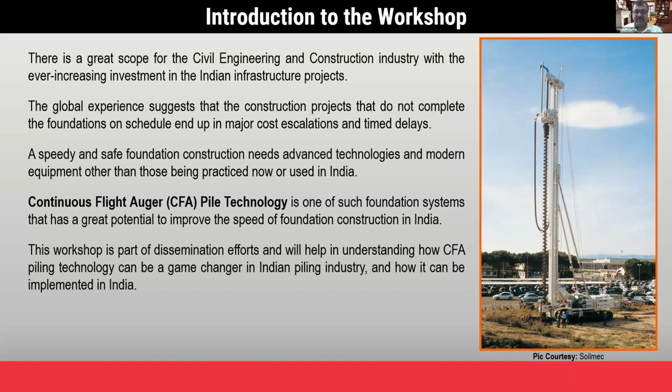Regarding the workshop participation, we are happy to inform you that we have more than 380 registrations from 11 countries. Among them, around 20% from student community, 24% from contractor side, 30% from consultant side, 16% from educators, 6% from developers, and 3% from suppliers. So with this, I will again welcome all of you to our online workshop.

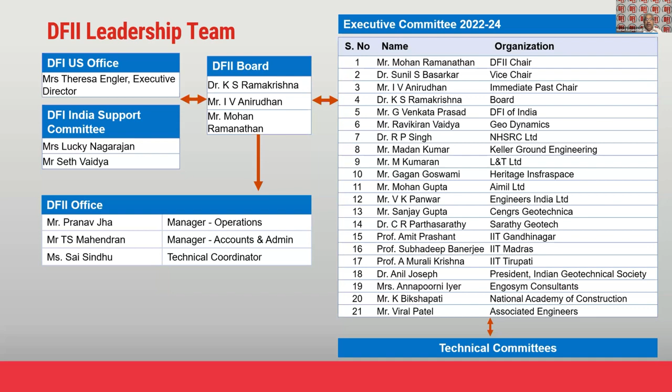The highlight of being part of DFI India is our conferences and other technical programs. Here's a snapshot of our executive committee in India, which is very active. We have 21 members, a mix of manufacturers, consultants, and academicians. This executive committee steers the decisions we make, and then we have technical committees which direct our activities.

We live on membership, and we always keep appealing for memberships in our membership drive. You can all visit our website, dfi.org, for members. Apart from our normal benefits, we have access to onlinepubs.org, onemine.org. This is a vast technical library of more than 125,000 technical articles, freely available for all members. I encourage you to go visit this site link and benefit from it.

We have technical committees which drive our work, and each technical committee has its own KPIs. One such technical committee is the CFA, which is a huge one for us, headed by Chair Sunil Basarkar. The result of this committee is today's workshop, and we'll have more such workshops in coming years in other parts of India. So on CFA piles, you will learn a lot about it today.

We have a very active committee headed by Dr. Sunil Basarkar. We also have a geotechnical characterization of foundation committee headed by Dr. Parthasarathy from Bangalore. This committee is also quite active. We conduct workshops, basically training and certificate programs for lab technicians. We find this is a big gap, that we don't have very qualified lab technicians, and we have great plans ahead, including 5-day workshops. You are welcome to come and join these and support these workshop practices.

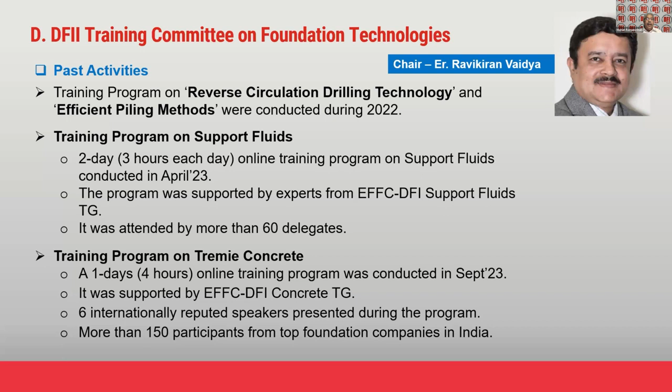We have a training program on tremie concreting. This has been a very popular program, and we welcome corporates to engage us, to invite us to conduct this program in-house. This is headed by none other than Ravikiran Vaidya, who the whole Indian piling industry knows. We also have other topics like ground improvement, and we are open to new topics.

Going forward, we have the Women in Deep Foundation India program. This is unique in the sense that we get all the women involved in geotechnical engineering. Mostly it's from the design office, and very few are entrepreneurs. We try to bring everything under one umbrella called the WDF India program, and it's always part of our annual conference. There's always a half-day session engaging them. I invite all the girls or women in this workshop to join this program and benefit.

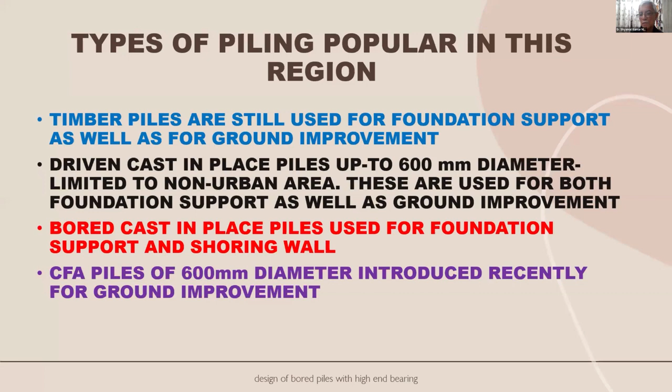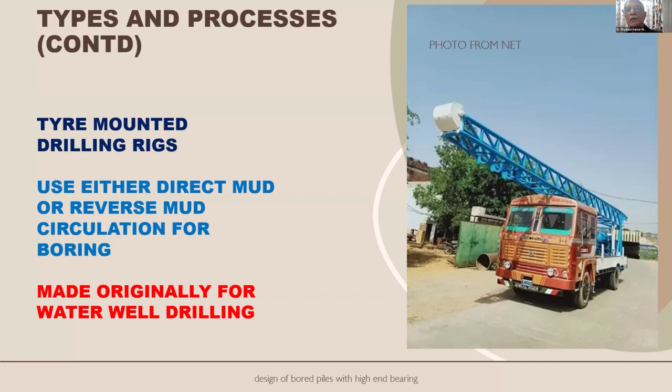Then you have tyre-mounted drilling rigs, shortly termed as TMR. Now, these use either direct mud or reverse mud circulation for the boring process. And we must understand it is basically made for water well drilling and not for piling. But they are used in some of the piling sites.

With this background, I had introspection on what to talk about on a subject so well researched and documented. There's nothing much to talk about in front of the experts. It's okay for beginners, but not for the experts. So I chose a subject basically to focus on this. This is a relevant topic, which is a reality, but scantily reported. And that is the performance of large diameter bored piles with high end-bearing component in alluvial deposits.

As I said, we have rock at a very, very deep depth, so we cannot take the advantage of founding in that kind of solid rock. But then we are constantly under pressure to design piles of high capacity, because of the demand for high-rise buildings in Kolkata. We already have a 60-story building, and other buildings of similar height are also coming up. And with this kind of soil, the challenge, as you can understand, is very, very big.

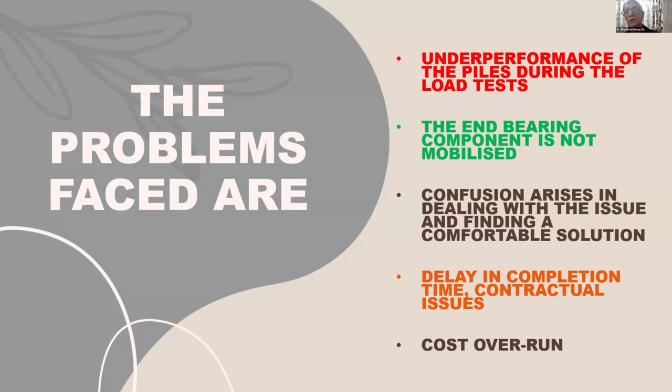And this is the topic I would like to bring forward for your deliberations, and share our experience so that you can come up with certain solutions, maybe a new type of piling process. So usually the problem is underperformance of the piles at present, and we'll deliberate on that. The problems faced are underperformance of the piles during the load tests, the end-bearing component is not mobilized, confusion arises in dealing with the issue and finding a comfortable solution, and delay in completion time, contractual issues, and of course, cost overrun.

The following areas of concern can be pinpointed. Soil investigation reports are not of requisite standard, unfortunately. Not always, but sometimes, more often than not.

Scanty exposure of the designers to the various processes available for construction of bored piles and their applicabilities. The designers in the designing office have very less exposure to the actual practices and the sensibility of the different processes to the performance of the piles they design.

These small capacity piles were much easier to design because you can do away with any end-bearing component, and we used to do that all these years, deriving the capacity through skin friction alone.

And then, absence of any geotech engineer is also a big point in the decision-making process at design stage. The geotech engineering concept has not yet been fully understood, that you need specialized input at the design stage, particularly the parameters that you take and the process you would like the clients to adopt.

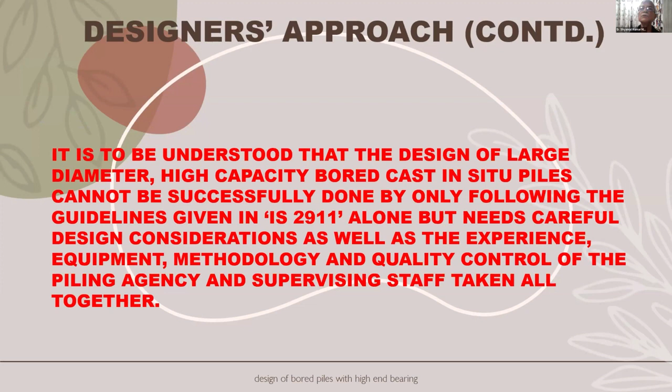The designer must clearly specify his or her choice of both in the design basis report. It is to be understood that design of large diameter, high capacity bored cast-in-situ piles cannot be successfully done by only following the guidelines given in IS 2911 alone, but needs careful design considerations as well as experience, equipment, methodology, and quality control of the piling agency and supervising staff taken all together. It's a joint collaboration.

Adopt the procedure as per BIS code for both end bearing and skin friction to design the pile, but ensure that the shaft is taken at least up to 3D into the dense bearing stratum. Do not consider any end bearing component at all if high class supervision is not expected. Major setbacks are often faced due to serious mismatch between predicted behavior of piles and actual, and that too at a rather crucial stage of the project. If you have to mobilize end bearing, then act as follows.

Include a full-scale trial bore to check the adequacy of the equipment and methodology of the intended piling work, as specified in the contract documents. This test is very important, in which actual stability of the bore and sedimentation in the pile base are checked periodically over a sufficient time gap expected between the end of boring and actual casting of the pile at the particular site.

This is important, and we do this nowadays. Also specify that the agency will only be allowed to cast the initial test piles after successful completion of this trial bore. These bores shall be filled with sand immediately on completion of the tests so that no one falls accidentally into the open borehole. This I thought important to point out, as it should be part of the contract document, because I have seen mishaps.

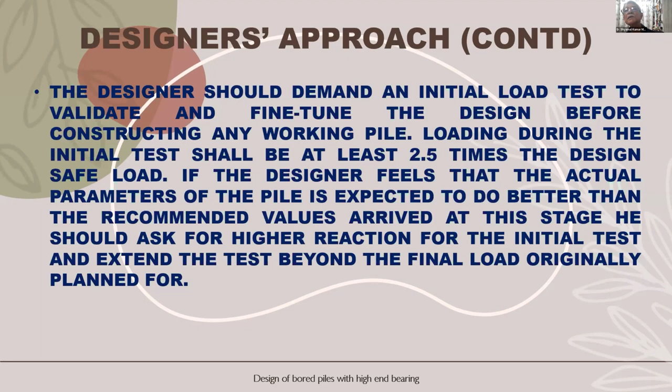The designer should demand an initial load test to validate and fine-tune the design before constructing any working pile. There is always a tendency to jump to the working pile from the owner's side. Loading during the initial test shall be at least 2.5 times the design safe load. If the designer feels the actual parameters of the pile are expected to be better than the recommended values arrived at this stage, he should ask for higher reaction for the initial test and extend it beyond the final load originally planned for.

It has been found more often than not that a well-executed pile performs better than theoretical prediction. The contrary is also painfully true, and piles with a high end-bearing component often underperform during initial testing. It all depends upon the preparation of the bore.

Causes of failure can be easily identified with the instability of the pile bore, improper use of drilling fluid, inadequate cleaning of the pile base, faulty trimming operation, and improper slump of concrete.

From the execution side, deploy only adequately powerful and dedicated hydraulic bored piling rigs along with properly designed cutting and base cleaning tools. It must have a functioning console to record verticality, depth, system pressure, etc. We often find that the torque required does not match the equipment brought to site, and that should be avoided. Standard DMC rigs are not advisable, and truck-mounted tripod rigs are not to be used at all for the construction of such high end-bearing piles.

Inspectors should inspect the cutting tools, their OD, air vents for avoiding piston effect, bottom cleaning buckets, etc. The manufacturer's original accessories are well designed, but very often locally fabricated tools are used, which are not designed properly.

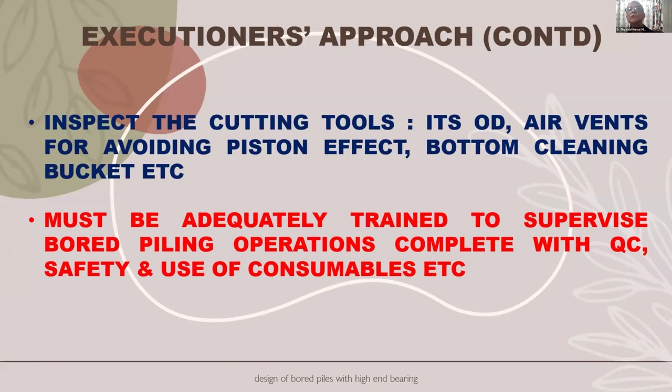The people at site must be adequately trained to supervise bored piling operations, complete with QC, safety, and use of consumables, etc.

Use of polymers with proper additives is recommended for achieving better quality pile bore as well as the best stability, apart from the fact that it is more eco-friendly. However, full-time technical supervision by the polymer supplier during the trial period must be made mandatory. He will not only check and approve the machinery, tanks, and pipelines for slurry preparation and distribution, but also fix the doses of polymer and its additives for the site, and stay put at site until slurry of satisfactory quality is produced routinely.

Then the executioner should have total control on the quality of preparation, distribution, and records of the drilling slurry. The Piling Supervisor's Handbook published by DFI and other government and professional bodies should be followed strictly for the proper construction of the piles. Slurry samples for checking the specific gravity shall be collected from the base of the pile prior to concreting and not from the slurry being flushed out at the ground.

In the tendering process, as a standard, the tender should contain the soil investigation report and the targeted pile capacities, and the bidders must satisfy themselves with the data and the expected capacity before quoting their prices. They will be encouraged to reconfirm soil data on their own, but submit their offers based on their own design. The best offer from both the technical and commercial side should be awarded the job.

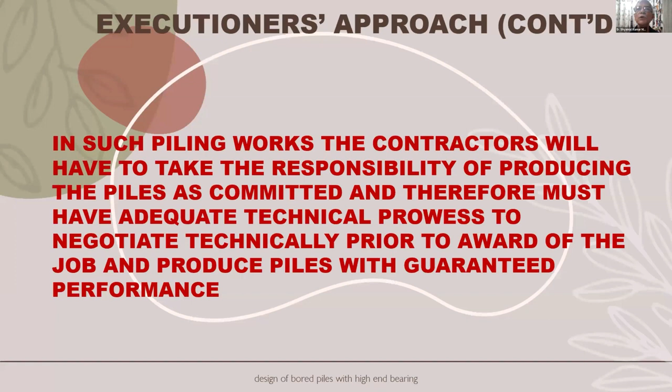In such piling works, the contractors will have to take responsibility for producing the piles as committed, and therefore must have adequate technical prowess to negotiate technically prior to award of the job and produce piles with guaranteed performance.

Two typical cases are presented here. In the case of sandy soil, the performance of an end-bearing pile will either be a disaster or satisfactory—there is no intermediate stage, unfortunately. Two case studies are now presented to show what the difference can be like. These are real-life cases, and for obvious reasons no details of the project can be revealed. In both, piles were resting in dense sand and designed to have a high end-bearing component.

Case one, I'm not going through the detail due to paucity of time, but all the piles were 1,000 mm in diameter, and about 33 meter piles were constructed. The first test pile failed, and you can see the length was increased by 5 meters, but that's not the reason for its performance.

As you can see in the next slide, the load settlement graph, just have a look. There's no match at all. The bottom thick black line represents the test pile, and it failed at around 300 ton, whereas the properly executed pile is nowhere near failure, even at much higher load.

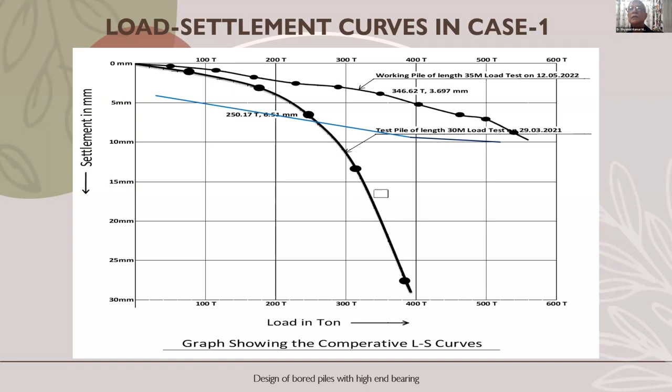Designing of end-bearing piles, conclusions are: bored piles without considering the hardware and quality control requirements is not a safe and proper practice. Site personnel with piling experience is an absolute necessity. Such persons are almost non-existent now. Economic considerations often sideline the need to provide strong focus on the quality of construction of the vital part of the project, which is constructed almost blindfolded.

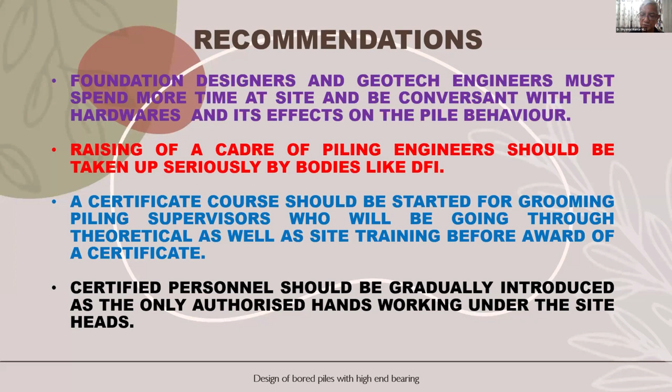Agencies with technical competency should only be considered for the tendering process. Agencies must take full responsibility for the performance of the piles.

Concluding remarks: problems and solutions of end-bearing piles have been discussed. Need for technically competent piling agencies have been highlighted. Need for trained professionals have been highlighted. Industry will be happy if newer systems like CFA piles or base grouting technique can produce end-bearing piles with more certainty.

Be responsible, design well, save resources, and save environment. Thank you very much for your kind attention.

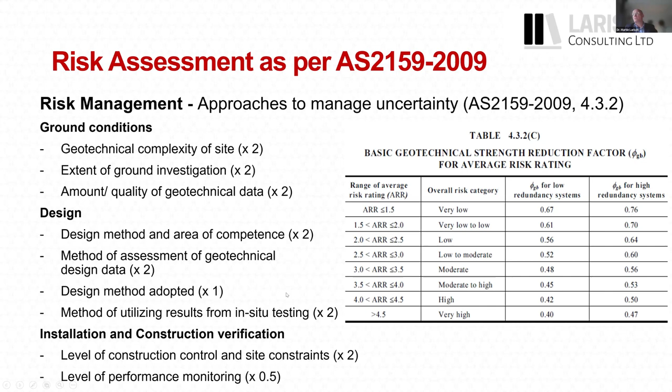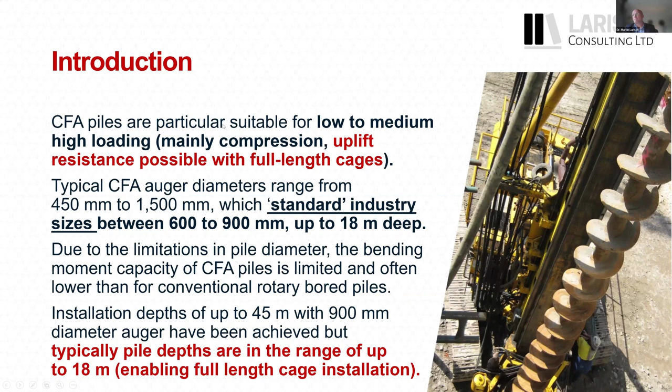CFA piling is very efficient and cost effective. If we chase suitable bearing layers that are reasonably close to the surface, we can use it for foundation piles, but also for embedded retaining walls, for basements and permanent retaining walls, particularly secant pile walls for 2 to 3 level basements.

CFA piling can be very efficient for standard rigs, 40 to 60 ton operational weight. This is a big one, I think a Fundex FX 3500 - hope I'm not wrong - with a 1.2 meter diameter auger. You see the massive size of this machine. Early in the morning, the top of the mast was covered in fog.

It's big. You see there's the reinforcement cage - it's a 12-meter cage, relatively light. In this case, piles could be installed very deep, but they were mainly in compression, so a short cage was possible.

Ideally, you want to construct CFAs with a single stroke. You don't want to use couplers. The key efficiency of this system is speed. If you want to use CFA and you can change your pile design, what I did in the past was just increasing the numbers but shortening them if the ground conditions allow that. But that's the key thing - not having to splice augers and not having to splice cages. This is the big thing.

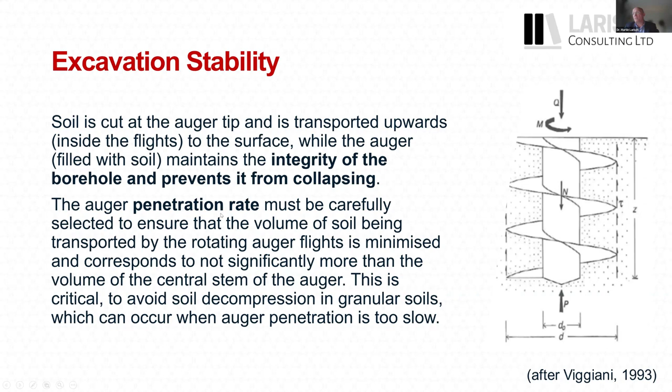And we will see that later on. If we keep rotating our auger without adequate penetration, we will attract soil from the side entering it. We call that flighting, or uncontrolled soil movement, and that needs to be avoided. This is one of another key risk of CFA piling.

But how does good look like, particularly in sandy soils? We need to keep our penetration rate to a minimum. Rule of thumb: if it's above 50% of the pitch height per auger rotation, we shouldn't get any flighting. So that means, you see the CFA auger on the right-hand side that's filled with soil. Let's say that's a foot, or 300 millimeters. You want to have at least 150 millimeters penetration per rotation.

It depends on your soil conditions. If you're in soft rock, that's obviously not possible. But generally speaking, rule of thumb for loose to medium dense sands, for firm to stiff clays, you want to achieve that in order to minimize your risk of construction issues and side loading.

CFA rigs are equipped with monitoring equipment, and sometimes contractors use the excuse, no, we don't have that. It's different than a normal bored pile. As mentioned earlier in the brilliant presentation before this one, with a bored pile, regardless if it's filled with bentonite or polymer, we can visually measure the depth. We can visually assess the cleanliness of the base, the diameter, with calipers or other methods. For CFA piles, we can't do that.

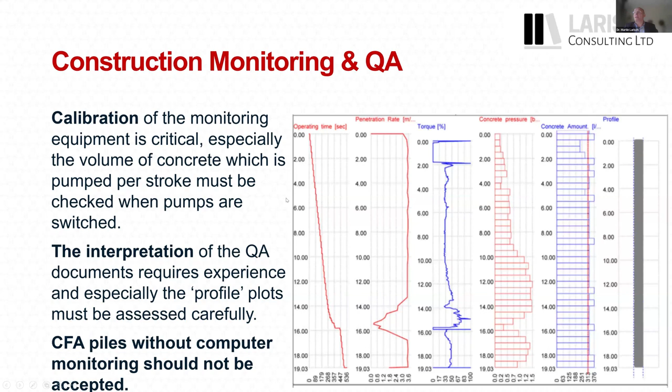There's always the odd pile when this monitoring system is damaged, doesn't work. But then we can always use manual reading and then stop piling and come back with a repaired system. General suitability for CFA piles: all type of structures with low to moderate and high axial loads.

And you always want to have a primary or soft pile in the corner section. This allows you to install the other two piles, the hard piles, in position. If you have a hard pile in position, it will kick out and you have to grout your corners. So as a designer, if you design secant piles, always, never ever have a fully reinforced structural pile in the corner. I've been involved in too many basements that were leaking, and the grouting costs to fix that, if you're chasing a hole, that's always great money for the grouting contractor, but for the client that can be a nightmare.

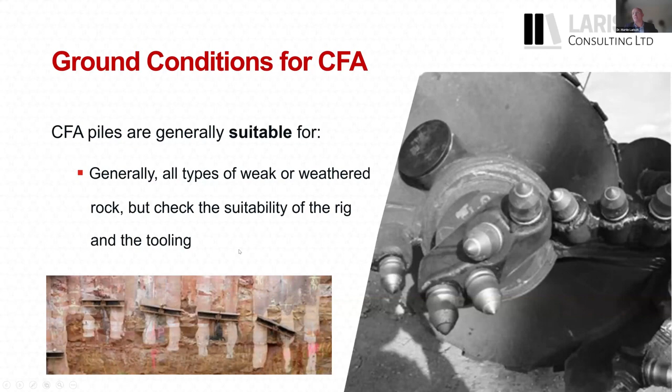General suitability in ground conditions: medium to very dense sand, so gravel, stiff to hard clays, all types of weak or weathered rock. We should avoid soil flighting above the rock. If this is not a problem, that's fine. If it's a problem, we should not do that. Installation below the groundwater table without casing or drilling support fluids is possible. We shouldn't use it for high strength rock because we simply can't penetrate it.

With rock drilling, you have to apply adequate vertical force to crush your rock, and then you transport your cuttings. With CFA augers, we can't bring that vertical force onto the rock. In soft soil conditions, my experience with undrained shear strength of less than 20 or 25 kPa, it's like you have this auger and you put it in a jar of oil, olive oil or something. If your soil gets more like a fluid, you can't transport it through the flights. So use something else, maybe a driven steel tube, and excavate it with the rotary method.

Contaminated soil, that's the thing. You really want to bring it up to the surface, then we have to deal with it. Sometimes we have acid sulfate soils a lot in Australia. We don't want to touch it, leave it in the ground, and then we basically use driven piles. If you have obstructions, organic soils or changing strata can be a problem.

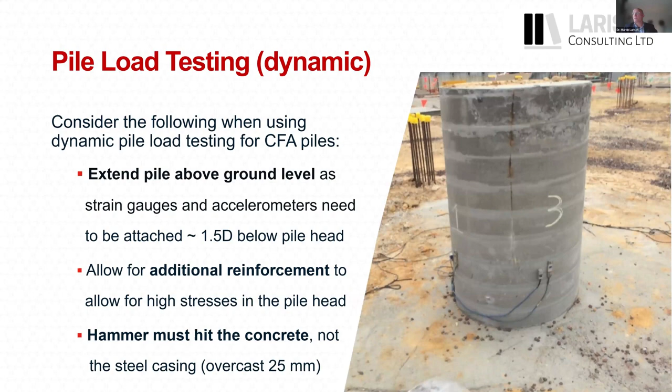Pile integrity testing can be done. We can use low strain testing, for example, PIT testing, very common for CFA piles. Often in this part of the world, we test 10 to 15% of working piles, mainly for buildings. For bridges, it could be every pile.

Rock sockets, they provide a challenge that's probably outside the scope of this webinar. But because of a similar density of the concrete and the rock, we won't get a clear toe reflection. And cross-hole sonic logging is uncommon for CFA because we have to install the logging tubes to the reinforcement cage.

You may add some retarders or others, but that's not ideal. Ideally, you want to tailor your construction program, your material length to suit that. Ideally, the cage goes down by its own weight. In some instances, the concrete is too stiff and unworkable. We may use vibrators just to give it this last little whip to go down the last 1 or 2 meters. Or if we're stuck halfway through, get the cage out, re-drill the pile, and on a second go, the cage, in my experience, will go in with 99% certainty.

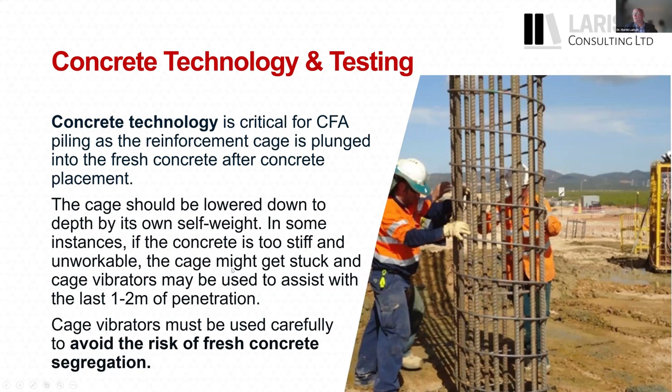Soft piles for secant pile walls should be not more than 10 MPa, with either early strength development or late strength development, and lab testing should be carried out to assess the workability of the concrete.

I would always use 10 millimeter aggregate, or in some regions 13 mil or 9 mil, whatever, but keep your aggregate size small because it's easier for the pump. Some piling codes consider at least 350 or 400 kilograms per cubic meter of cement.

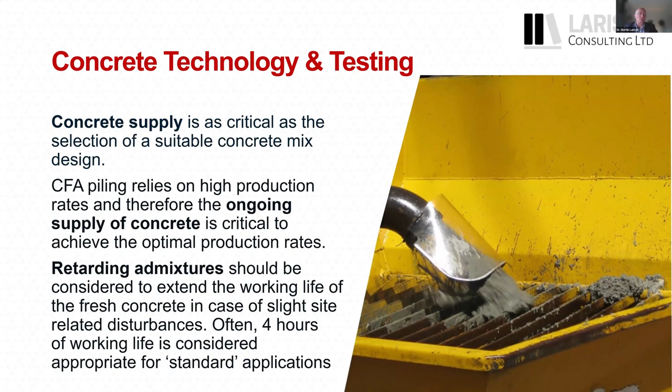This is really important. I normally use a 4-hour working life, just for my jobs, but that's because if you have heavy traffic, it allows a bit of contingency. A few construction risks, I'll probably skim through them a bit quicker.

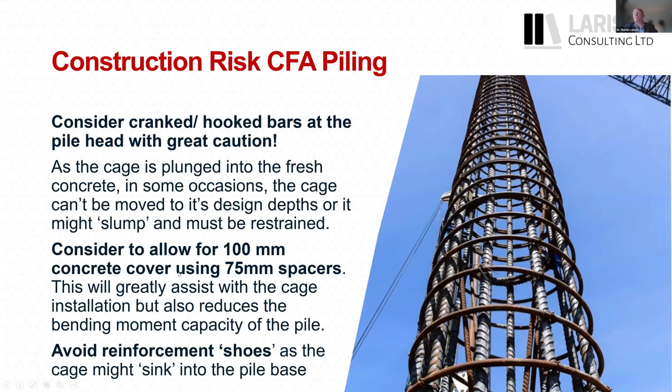Cage spacers - we see that they must be installed, that's quite important. In my design, I often allow for 100 millimeter concrete cover using 75 mil spacers. That gives a little bit more room for installation.

Another thing, probably the last point, is the distance from the center line of the pile to a wall, to any vertical walls. We see that here very often. If we have a vertical obstruction, with CFA piles in particular, you have the drilling motor, and it just simply can't physically go any closer. So usually I take 900 millimeters or a meter from the center line of my pile to the edge of the wall, so that the piles can be installed.

Contractors may have different rigs that can get closer. You may say, oh look, this in front of the wall thing from Bauer. Yeah, but that's not applicable for CFA because CFA have the drilling motor on top. I've been there, and that's quite embarrassing if it happens.

Probably one more thing, severe side loading. We spoke about that. If you drill your auger into hard clay with loose sand above, you just transport this loose sand to the surface, and this may cause settlement of adjacent buildings. Or the other way around, if you drill through stiff clay with loose sand down there, you will get soft toes - you won't get the resistance because you keep spinning the auger and create a big cavity down there.

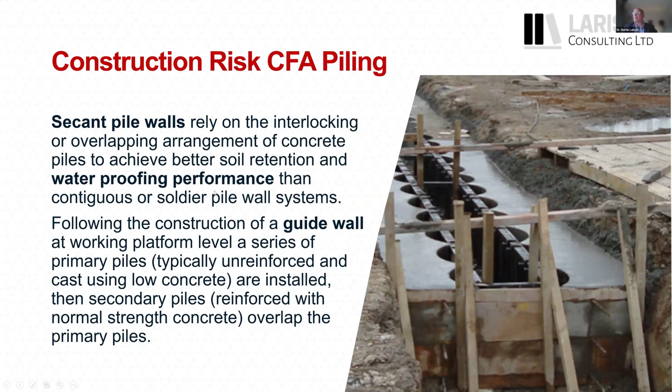All right, so basically some more things about guide walls, and you will see that in the slides later on. Waterproofing performance, if you have basements, just a little bit of guidance on that one - the Institution of Civil Engineers has a good guidance document.

I heard some rumors that DFI is looking into that as well. Nothing confirmed, just something I heard. Maybe I'm wrong about that. All right.

Summary: they are concrete piles, very efficient and a very good system. They have a few risks and probably a few more, but I tried to highlight the key risks and opportunities. It's a fantastic system, but it needs to be treated with the respect it requires because things can go wrong.

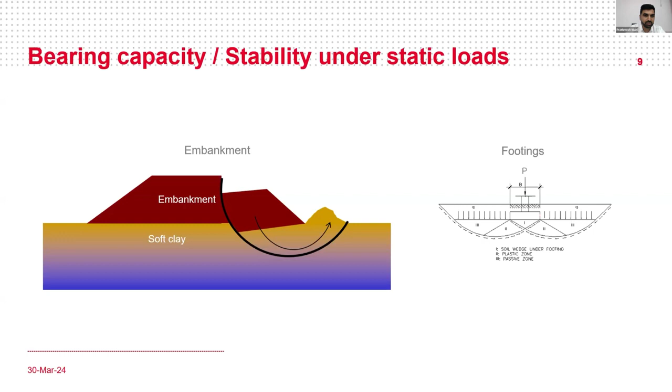What comes after settlement? It's bearing capacity. We could see that most embankments fail in base failure due to the weak stratum below the embankment. This is an example of one embankment failure - we see the top of the embankment settle down, base failure has happened, and we see a heave at the toe, due to the weak soil beneath the toe of the embankment.

So when we think about poor soil, what first comes to mind is to replace it, to construct and execute deep foundations, to allow some additional settlement and impart structures, or else we can do ground improvement. With ground improvement, we can cut down the cost, save time, and avoid the other measures I explained.

So we have a different range of techniques. If we have very soft clay, peat soil, or soft soil, we can do consolidation. If we have sandy soil, we do compaction techniques as mentioned in the figure. If we have both kinds of soil, we usually do inclusions. When we install inclusions, the soil becomes a composite soil. When we do consolidation or compaction, the soil densifies and creates a homogeneous soil.

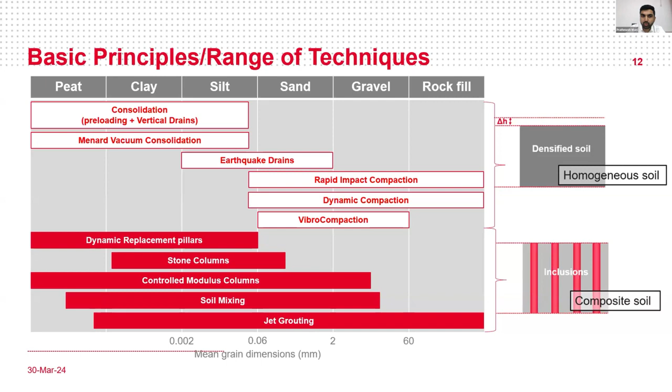Today we will be focusing on CMCs - what CMCs are. So we'll jump into CMCs. CMCs are a ground improvement method where inclusions are made up of rigid material such as concrete or mortar to achieve bearing capacity and reduce settlement.

CMCs were invented in 1994 by Menard. CMCs are typically unreinforced vertical elements that are stiffer than the surrounding soil, and this stiffer material - CMCs are applicable in all kinds of soil.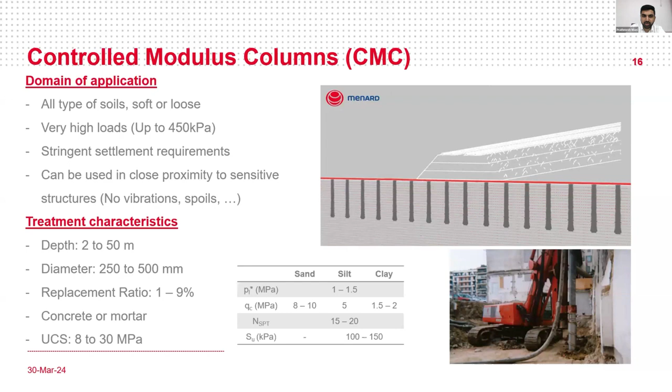So how much treatment can we do? Looking at the treatment characteristics, CMCs can be done from 2 meters to 50 meters, with a diameter range of 250 to 500 mm. The replacement ratio can be kept at 1 to 9%. The material should be concrete or mortar in the range of 8 to 30 MPa. In this table, we can also see the anchoring requirements, which I will explain in the next slide.

So how does the CMCs work? CMCs generally distribute the load from any structure onto the LTP, between the CMCs and the surrounding soil. The load comes onto the load transfer platform and creates an arcing effect, distributing the load over the CMCs and the soil in between two CMCs.

For CMCs, the degree of improvement depends on parameters such as the thickness of the LTP, the spacing of CMCs, and the replacement ratio - how tight or wide the spacing would be. Then there's the anchoring layer, which also depends on the thickness of the CMCs coming into the anchor layer.

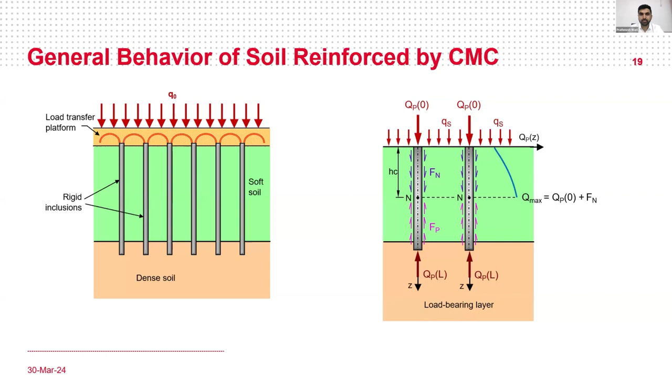The advantages of CMCs: CMCs are very cost effective compared to piles and stone columns. Because of the rigidity of the CMCs and their load carrying capacity, you require a lesser number of CMCs. You can widen your spacing and reduce the number of CMC columns, so your quantity is less, which reduces the cost.

CMCs are very cost effective compared to piles and stone columns, and are successfully executed all over the world and accepted by consultants and authorities. CMCs reduce the cost compared to other techniques, and it is very fast in execution - comparatively fast, which my colleague Ian will explain in the execution section.

Vibration, as I have shown you in the figure, you can execute the CMC very close to a very sensitive structure, and you will have no vibrations and no spoil on the surface.

Applications of CMC: we have applied CMCs on the warehouse project in Logos, Australia. In oil and gas, we have used this in Majnoon, Iraq, installing CMCs for the tanks. We have used CMCs under embankments and MSE walls and in South Ring Road, Poland. We have used CMCs under a wind farm in Fantanele, Romania. In the power sector, we have used CMCs in Yanbu power plant, Saudi Arabia. And we have done a lot of residential projects in Abu Dhabi, in Emirati housing and the UAE area.

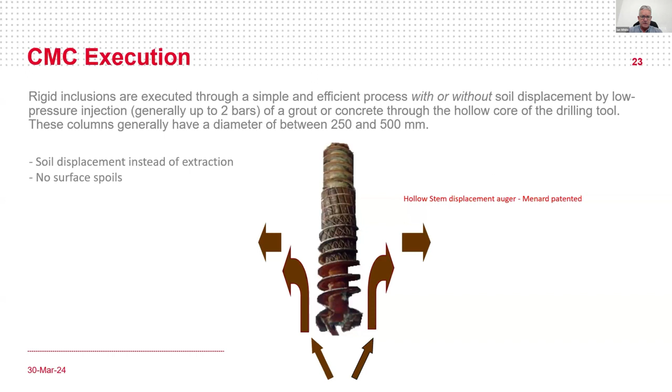We've got a short video here just to show you, from Menard in Spain, the execution of displacement piling. It's the same setup, same piling rig, same concrete pump, concrete lines - everything is the same as CFA piling. You can see the tool going into the ground, and just above there the smooth circular Kelly, which is not an interlocking Kelly, and not the extended CFA flights to the top. So the tool is penetrating right down to depth, working in the loose soils. The concrete needs to be the same - very similar to CFA. There's no real difference, except there's no cage installation, which means everything is a lot quicker. You're just moving from this point to the next point.

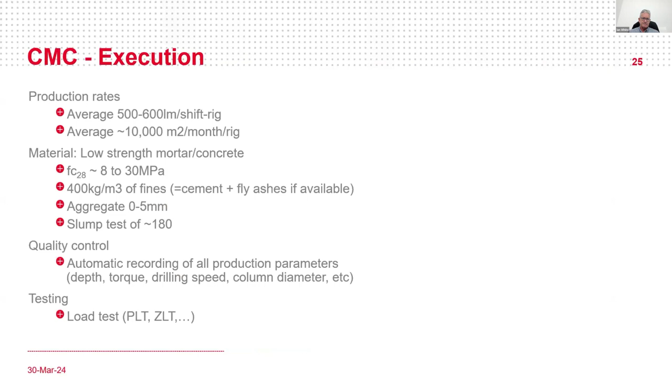So I think we can go to the next slide, Prathmesh. Average production is quite high compared to the likes of stone columns - much higher, and that's what we're comparing it to here. This is the market that we are targeting in India, the same as explained with Prathmesh in the Middle East. We've taken over a huge market in the Middle East with our CMC piling, replacing the stone columns.

Low strength concrete, again similar to CFA as explained by Dr. Martin - 5 millimeter or 10 millimeter aggregate is better for flow, and a slump of 180 to 200.

We've developed Menard's Omnibox system, which is our data logging, recording depth, torque, drilling speed, column diameter, and also speed of extraction to make sure we construct and execute the optimum column. Some of you might be familiar with Jean Lutz - yes, we do use Jean Lutz as well. But Omnibox is our own in-house development that we're now using across the world. Testing - load test, plate load test, zone load test - is part of the testing of CMC and the specification for CMC.

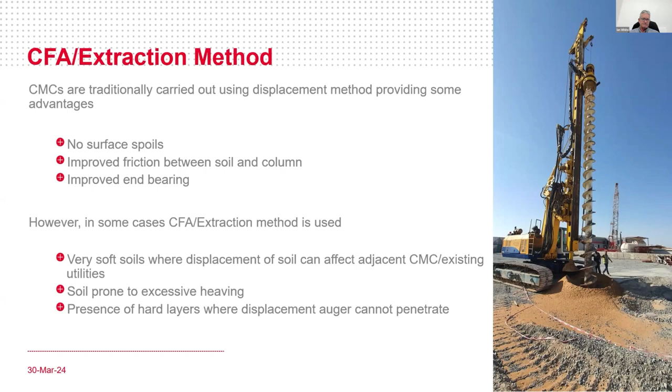Thank you, Ian. So we will look into some case studies which we have done.

This is one of the case studies - an oil and gas project, the Basra refinery from Iraq. We have 47 tanks here, ranging in diameter from 7 to 58 meters, plus one LPG tank. All these tanks have different foundation types, which I will explain in the next slide.

We installed CMCs of 400 mm diameter with lengths ranging from 8.5 to 17 meters, and grid spacing of 1.5 to 3 meters, around 2.9 meters. We have different soil profiles here - in some cases the anchorage layer is clay, in others medium dense sand. In clay, the anchor length is 1 meter, and in medium dense sand it's 0.5 to 1 meter as per requirement. Total number of CMCs executed was around 24,000, with a total of about 196,000 linear meters.

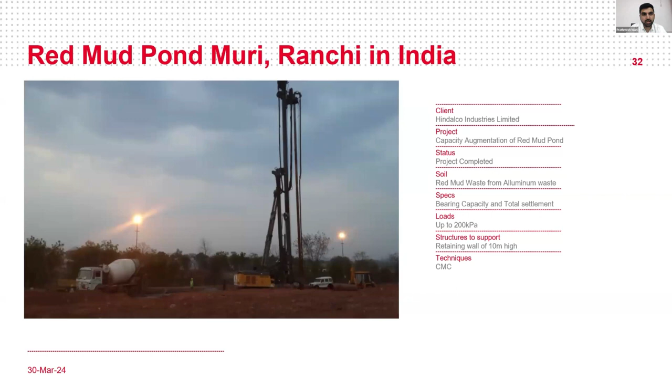This is one more project we did for a data center in Khazna, Abu Dhabi, UAE. The soil was Sabkha, and we installed CMCs of 350 mm diameter with a length of 7.2 meters, with grid spacing varying from 2 to 2.4 meters square. The load here was around 200 kPa for the slab on grade, and 150 kPa for the footings.

This is one more example of a project, which is Dubai Creek Harbour. We installed CMCs below an MSE wall, and the MSE wall was huge with a load of around 300 kPa. The project specs were to achieve the differential settlements and total settlements.

The soil profile was very loose silty sand with a depth of 14 meters. Then one more example, an asphalt plant. Again we have tanks here, and the load of the tanks was 180 kPa. The soil was loose silty sand of almost 10 meters, and we have 2 tanks and 1 reactor here.

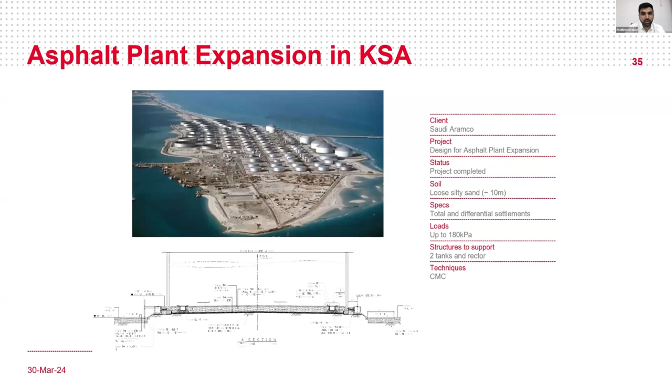As I mentioned before, we have done CMCs below wind farms as well. This is an example of the Fantanele wind farm in Romania. The loading here is around 200 kPa, and we installed here, and it was successful. Thank you. For any further inquiries, you can contact us.

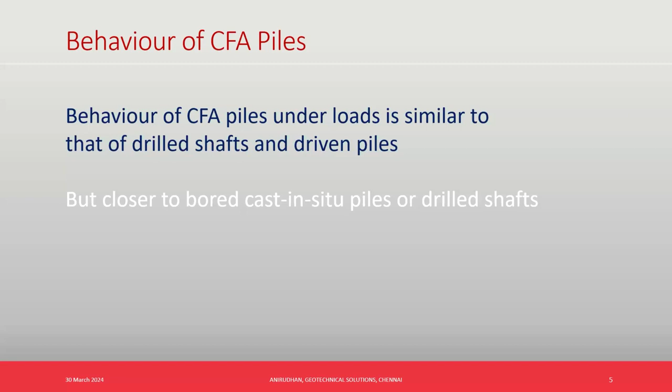As far as the behavior of the CFA pile is concerned, we have very similar behavior to any other piles, but the behavior is more closer to bored cast-in-situ piles or drilled shafts. But we have better performance compared to bored piles because there is no drilling fluid in the construction process, and there is no significant base disturbance, depending on the type of soil available at the base. There is also no chance of any hydraulic imbalance while making a borehole, because we do not make a borehole in the case of CFA piles.

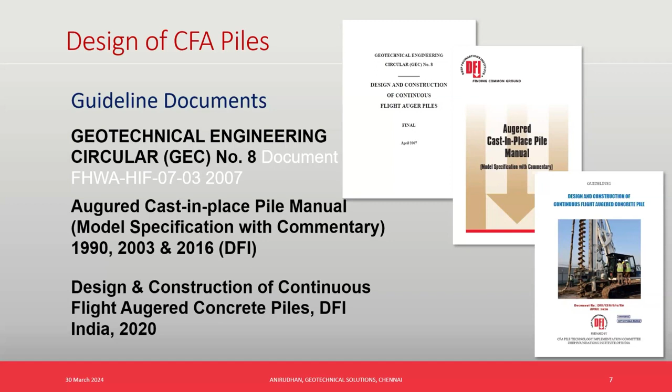We have several guideline documents for design of CFA piles. As discussed by Mr. Martin, the Australian code is conveniently used, and we generally follow whatever the US has produced, and to some extent what the UK has produced. One of the most detailed documents is by the Federal Highway Administration of US, Geotechnical Engineering Circular GEC 08. We also have the Augered Cast-in-Place Pile Manual by DFI, which was modified in 2016, and a design and construction guideline by DFI of India based on trials conducted during 2019. These documents are available for design of CFA piles, and I will briefly explain the provisions in these documents.

Like any other piles, CFA also derives its capacity from side resistance as well as base resistance. The side resistance is due to friction and adhesion along the interface of the pile shaft, and the base resistance is developed by cavity expansion around the pile base. As with any other piling system, we can estimate the side resistance and base resistance separately and add them together to get the full capacity of the pile. So we have the common equation: total resistance is the sum of the side resistance and the base resistance.

The side resistance is a summation of the side resistance from different layers along the pile shaft, and the base resistance is based on the soil characteristics at the base.

For estimating side resistance, we divide the soil profile into several layers, estimate the resistance from each layer using the side resistance from that layer multiplied with the surface area of the shaft within that layer, and sum it up to get the total side resistance.

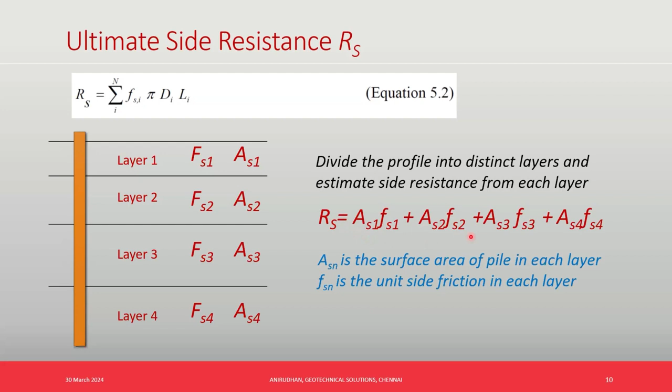Similarly, for the unit base resistance, we use the properties of the soil at the base, and it is a function of the unit base resistance and the area of cross section of the base. We need a certain embedment into the bearing stratum to achieve the full base resistance, which I will discuss in the next couple of slides.

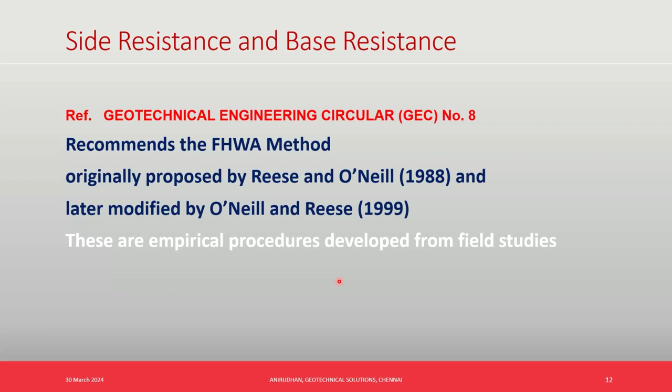As I said, we generally depend upon the Federal Highway circular GEC 08 for estimating the side resistance and base resistance. These procedures are developed from research carried out by Reese and O'Neill on several test piles, who developed empirical procedures for estimating the base resistance and side resistance. Studies show that this procedure is reliable in estimating CFA pile capacities in both cohesive and cohesionless soils.

For a given pile segment, the ultimate unit side resistance is a factor of undrained shear strength, SU, in the case of cohesive soils, and an adhesion factor alpha of 0.45 to 0.55 is used in the estimations, based on field experiences. There is also an apparent limit of 115 kPa as the unit side resistance, equivalent to undrained shear strength of 250 kPa. So for stiffer soils, we do not increase the side resistance based on undrained shear strength, but limit the unit resistance to 115 kPa.

There is also a procedure from cone resistance profile in which we estimate the side resistance from the point resistance we have from the CPT or CPTU. For example, for cone resistance of 2 MPa, we have a side resistance of 80 kPa or 0.08 MPa. For cone resistance of 5 MPa, the resistance is about 115 kPa, which is the limit recommended by these procedures. As you can see, we have a limiting side resistance after exceeding a certain cone resistance value; we cannot keep increasing the side resistance for higher cone resistance values.

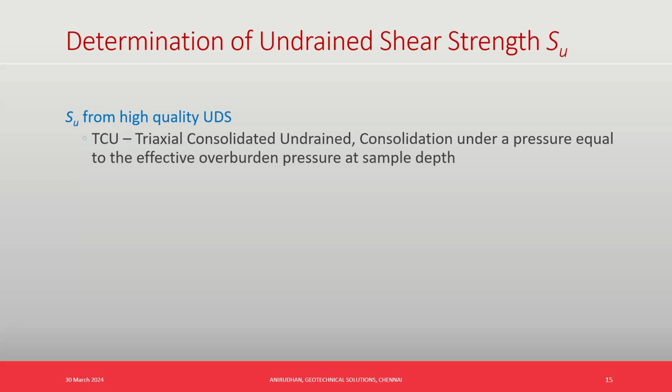Coming to the base resistance, it is also a factor of undrained shear strength. We often use the bearing capacity factor NC ranging between 6.55 to 9 for estimating the ultimate base resistance for piles resting in clay soil.

When the shear strength is smaller than 200 kPa, we try to use a reduced bearing capacity factor. When we have a smaller shear strength, we use the lesser bearing capacity factor of 6.55. When we have the maximum undrained shear strength, we use NC of 9, which is the maximum limit for any estimation.

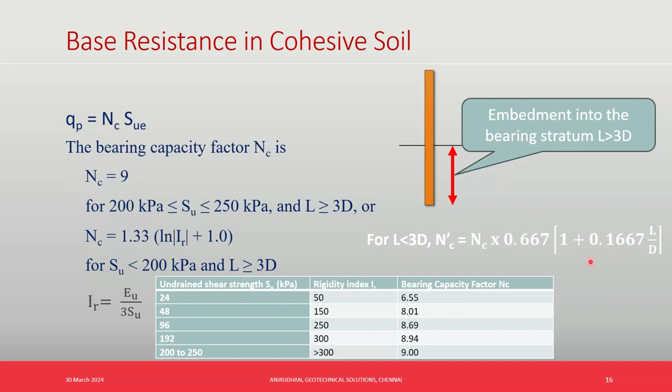There is also a very conservative estimation from CPT and CPTU profile for the base resistance, given as about 15% of the cone resistance, which is very conservative compared to the procedure using undrained shear strength. Here also we have to use the average cone resistance, the minimum between the length, that is 3D above the pile base, and 3D below the pile base.

In the case of cohesionless soil, we adopt the effective stress approach for estimating the side resistance using the standard function, where friction resistance is a function of the angle of shearing resistance, the earth pressure coefficient K, and the effective stress at the mid depth of each layer we consider in the estimation.

From field procedures, this parameter K into tan phi, which is a function of the earth pressure coefficient and the shearing resistance, into one single factor called beta, which they found is very much dependent upon the depth of each strata. Based on field experiments, these experiments are used for estimating the beta factor, which is a combined factor of K and tan phi.

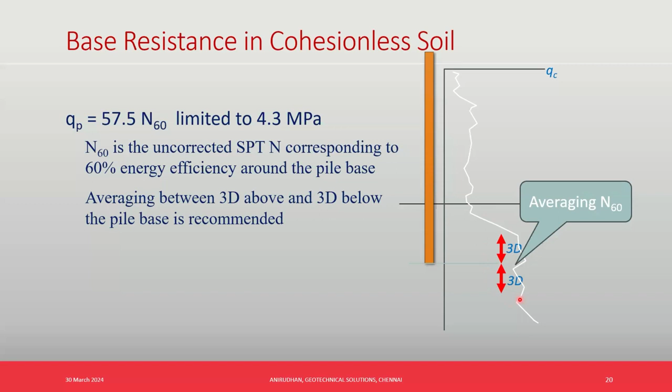We can also estimate the base resistance using the cone resistance profile, using this expression, again with the averaging of the cone resistance within the depth range above and below the base of the pile. So this is the way of estimating the ultimate capacity of any CFA pile, very similar to what we use for other drilled shaft and driven piles or any other type of piles.

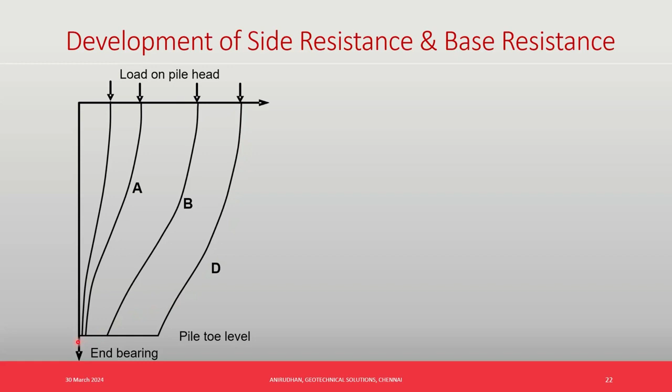When we talk about how side resistance and base strength are developed along the pile during loading, there are several studies on instrumented piles which showed that when we apply a load at the pile top, it is initially taken by friction at the shallow depths. As we increase the load, it keeps developing more friction towards depth, and starts developing a very small amount of base resistance. As we keep loading the pile, we develop full skin friction and then start developing more and more base resistance.

From these experiments, we have seen that we need about 0.7% to 1.2% of the pile diameter as the pile movement for mobilizing the full skin friction, but only very limited base resistance is mobilized for this displacement. When the displacement is more than 5% or 10%, we develop the full base resistance. These are from the experimental, instrumented pile testing procedures.

We can see more clearly from this expression, you develop the end bearing at this rate as we move the pile or load the pile, and it achieves certain movements. But you can see that the full amount of skin friction is developed for very small movement. We add up these two values to get the ultimate capacity of the pile, or the maximum capacity of the pile under each increment as the pile moves downward.

So we arrive at the safe capacity of this CFA pile, also very similar to other piles, by applying a factor of safety of 2 to 2.5 over the ultimate capacity. Generally in normal procedures, we apply a global factor of safety equal to 2 to 2.5. In the case of estimated values, where we add both side friction and base resistance to get the ultimate capacity, we divide it by a global factor of safety of 2 to 2.5. If you do a pile load test, we use a global factor of safety of 2 to arrive at the safe capacity.

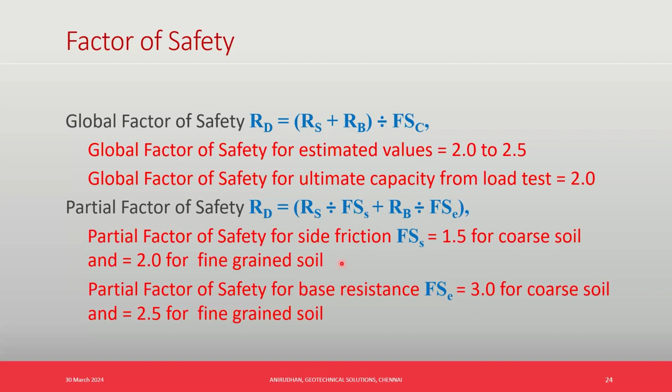As we have seen in the response of any pile under loading, most of the skin friction is developed for very small movement. We can also go for a partial factor of safety approach, in which we give a lesser factor of safety for the skin friction, in the range of 1.5 to 2 — 1.5 for coarse soil and 2 for fine grained soil — and a slightly higher factor of safety for the base resistance, which is 3 for coarse soil and 2.5 for fine grained soil. We take the least of these two values to arrive at the safe capacity of a pile. This is true for most types of piles, not only CFA piles.

Coming to the response to lateral loading, we can use the standard subgrade modulus approach given in IS code, or we can also go for a PY approach for estimating the lateral response. But if you see the IS procedure, they have given certain very low values for the coefficient of modulus variation, which is considered very conservative. Many studies have shown these values are very small and produce very small lateral resistance. We recommend using more realistic values for lateral resistance of piles, including CFA piles.

As in the case of any other piles, the uplift capacity is also equal to the total side resistance. But we tend to use a slightly reduced value compared to the total compression friction. About 75 to 80% of the side resistance under compression is considered as the ultimate capacity.

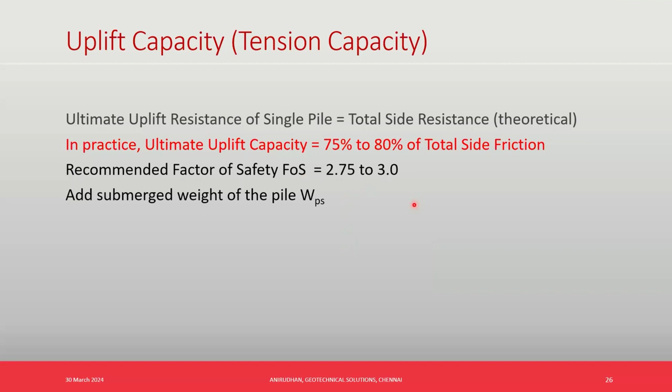Thank you. The recommended factor of safety is about 2.75 to 3 for estimating the safe uplift capacity. We can add the submerged unit weight of the pile also to get the gross safe uplift capacity: 80% of the side resistance under compression load, divided by the factor of safety, and adding the submerged weight of the pile, we get the safe uplift capacity.

When we come to group CFA piles, here also we have to apply group efficiency when the pile spacing is very small. We tend to have full efficiency equal to 1 when the spacing is more than 6 diameters, and reduced to about 2/3 or 75% when the spacing is only 2.5 times the pile diameter. We can get the group efficiency by interpolation between these spacings for other spacings.

In the case of cohesive soils, we have to consider a block failure to find out the group efficiency, meaning we have to find out the bearing capacity along the sides and from the base of this block confined by the piles to arrive at the group efficiency.

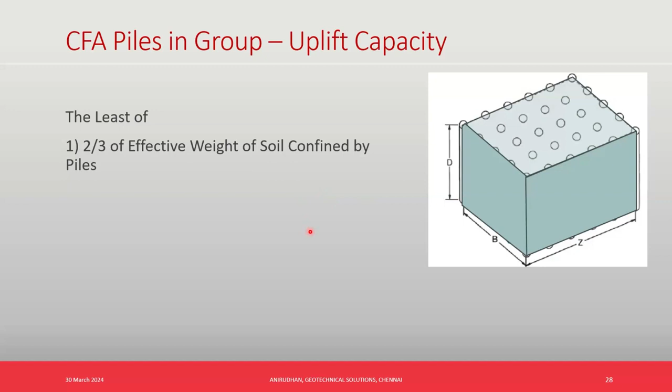In the case of uplift capacity, we have to assume the uplift capacity as the weight of the soil confined by the piles. We consider 2/3 of the effective weight as the safe uplift capacity, which is the total weight of the soil confined by the piles. Or alternatively, half of the effective weight plus half of the resistance along the surface between the soil surface. So this is one way of estimating the safe capacity of a group under uplift load.

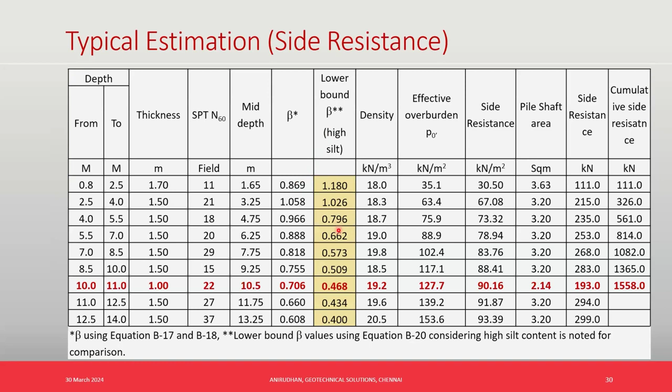A typical estimation we did for our trial site, where we have silty sand layers with more than 60 to 70% silt content. This is a typical estimation of side resistance using the beta procedure, using the standard correlation for sand layers, assuming high silt content. We estimated the base resistance using the standard SPT-N value and the standard expression for sand profile, and got a base resistance of about 459 kilonewton, with total resistance of about 2000+ kilonewton as the higher upper bound and about 1700 kilonewton as the lower bound.

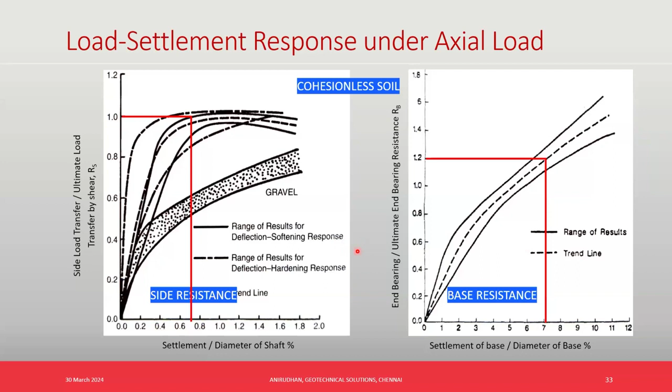So when we think about the settlement response under axial load, as explained earlier, very small movement of the pile will develop full skin friction, and we need a larger displacement of the pile base for full base resistance. The earlier example was cohesive soil; this is for a cohesionless soil. Similar performance is found for piles in cohesive soil as well.

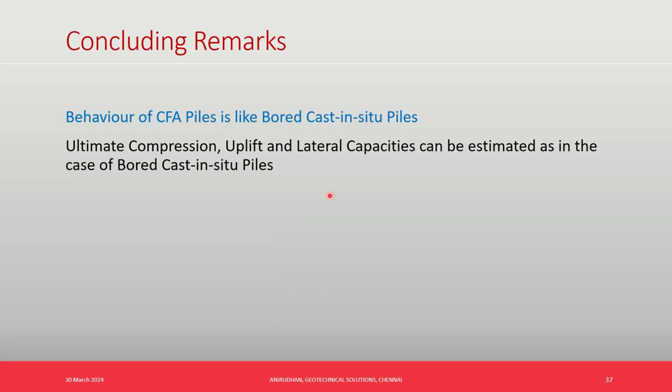We can follow the same procedure for estimating the safe capacities. Concluding remarks: the behavior of CFA pile is like bored cast-in-situ pile. There is no much difference, except that there may be mild improvement in the load settlement response. Ultimate compression, uplift, and lateral capacities can be estimated as in the case of bored cast-in-situ piles. The estimation often results in conservative values, and there is scope for improvising the estimation based on experience in Indian soil conditions. And these are some of the selected references.

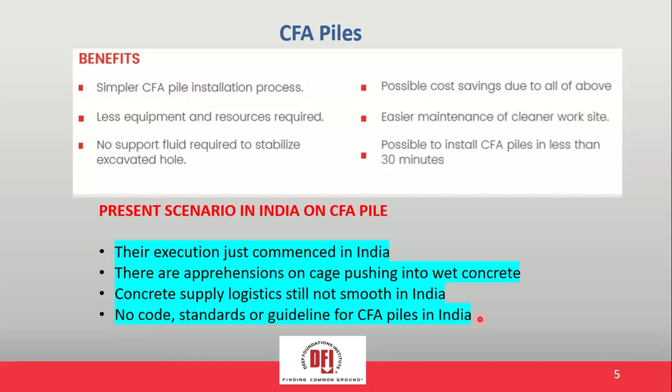How do you apply it to the soil types? As our earlier speakers had informed, clay, silt, sand, gravel, soft rock, and even limestone type weak rock can be amenable to CFA piles.

Partially weathered rock with modification of the tip of the auger can also be made amenable to CFA pile. But if it is a high bouldery rock, a refusal beyond, let us say, SPT of 75, CFA pile can be a challenge. In rock, CFA pile should not be executed.

If you see the Indian soil map, most of the alluvial zones are very much suitable and favorable for CFA pile. Bulk of the Indian map, I'll say close to about 30 to 50% of Indian soils, are amenable to the CFA type of pile. This includes the northeast portions of India, much of our coastal regions, part of Gujarat, part of North MP, Rajasthan, Delhi, and all alluvial areas—they come under a suitable zone for CFA piles.

Now, what are the equipments that can be suitable for Indian conditions? We need to be very particular that whatever equipments or modifications of the tool are required, they have to be very suitable, economical, and adaptable in the Indian region.

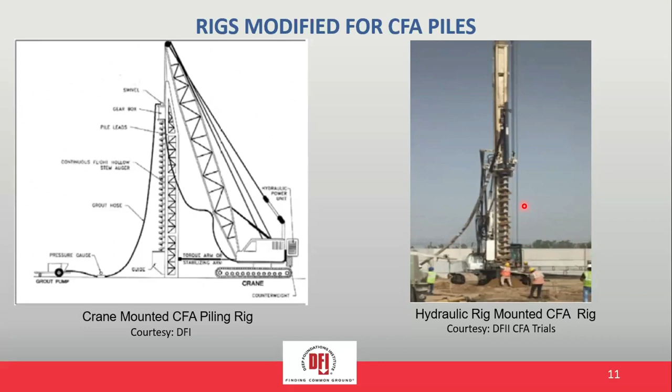The conventional hydraulic rig can be modified to include a long flight with a top head, the cat head, and the modified bit at the bottom. They can serve to have a continuous flight of even up to 20 meters long.

How do you plan for the equipment in CFA pile, particularly considering the Indian scenario in mind? Here is a typical hydraulic rig fitted with the CFA pile flight.

What you'll require is a CFA with an attached drilling bit, sleeves to connect to the hydraulic rig, a rotary head and cat head to connect it at the top, and an auger guide that ensures verticality of the auger, along with sensors and data monitoring attached to the panel of the rig.

This AMU, or automatic measuring unit, can assist us to monitor the progress of the pile and assure the quality of the pile that is going to take up the load.

Now you have to continuously remove the soil from the auger, which means you need to have a mechanical cleaner. The faster the operations of removal, the better it is for the housekeeping of the site.

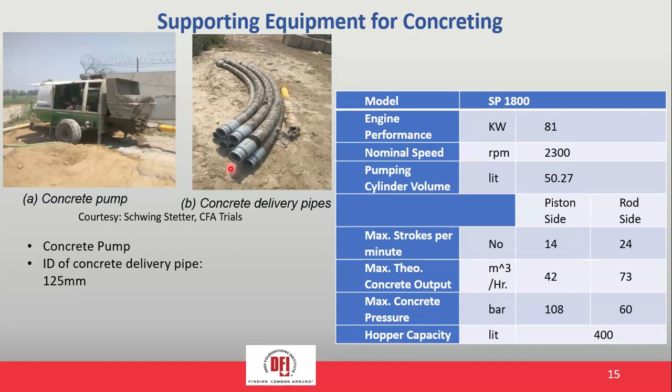The concrete pressure will typically vary to a maximum of 108 bars. You need to have a hopper capacity of approximately 400 liters. The diameter of this supply pipe can be typical of any other concrete supply pipe, about 125 mm.

Then you'll require a crane, typically 55 to even 70 ton capacity, that is going to lift up the cage and lower it into the wet concrete.

Normally, a cage has to be designed to go completely into the wet concrete by its own weight. So any form of concrete mix design should ensure that the pile is capable of having the cage inserted into the concrete pile on its own weight.

If it doesn't happen, at times the cage gets stuck. You need to have a provision, an emergency provision of a ring vibrator underneath. With the ring vibrator, you can provide vibrator impulses and push the cage into the wet concrete.

Then you require a batching plant. A batching plant requirement should typically be 45 cubic meters per hour. This is well decided by the plant engineer, who is well versed with the requirement of the pile.

This will depend on how many piles are under activity, what is the diameter of the pile, the length of the pile, and the capacity requirement. This will decide the batching plant capacity.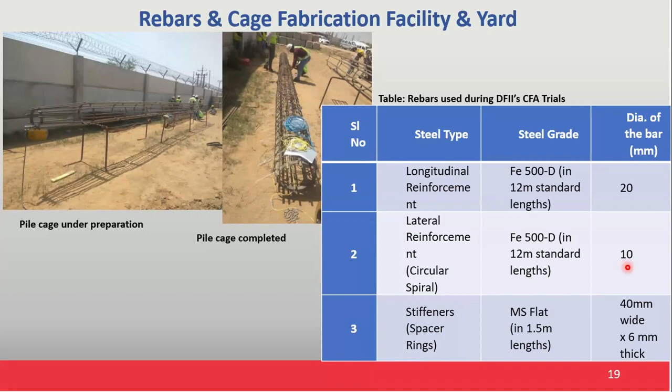There can be circular synthetic cover blocks, or mortar cover blocks. The one shown here is a synthetic cover block. It will be left up to the designers and executioners to decide what type of cover blocks is required.

Now you can go in for some kind of instrumentation for the CFA pile cage. The cage will be fitted with instruments. We can have sensors, data monitors, with a data logger at the top, which can assist us in knowing the load transfer behavior of the CFA pile.

QC requirement of a CFA pile is the most and the foremost consideration. The typical factors include the appropriate mix design of the concrete or grout we are using, and design of the steel cage for its sturdiness. The cage should be sturdy enough to be pushed into the wet concrete. There are other quality requirements related to the auger advancement and its withdrawal, with simultaneous concreting or grouting from the pile bore.

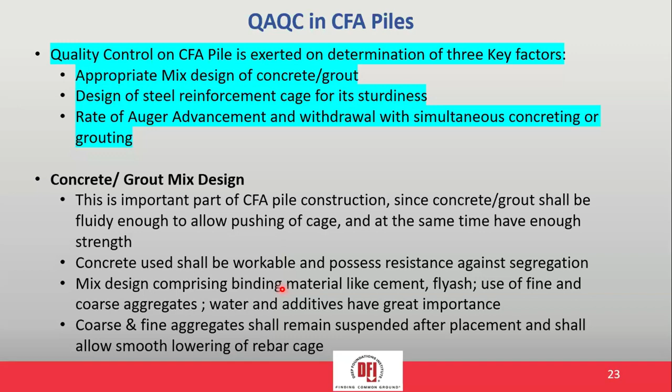Sturdiness is an important parameter, which means it's better to have more bars of lesser diameter with lesser spacing, rather than larger diameter bars with more spacing. This factor has to be borne in mind. Ring spacing has to be as close as possible, preferably about 150 mm, or 6-inch center to center. The idea is to have a sturdy and stiffer cage that imparts sturdiness to lower it into the wet concrete.

This is the AME unit, which means all the parameters of the pile during execution will be monitored and recorded in data logging form. You get the pile profile throughout the depth, and the concrete volume consumed. The grout factor is nothing but a ratio of the actual versus theoretical concrete consumed. The drilling rate, auger lift rate, concrete pressure, and auger rotating speed at the top are all recorded by automatic monitoring devices.

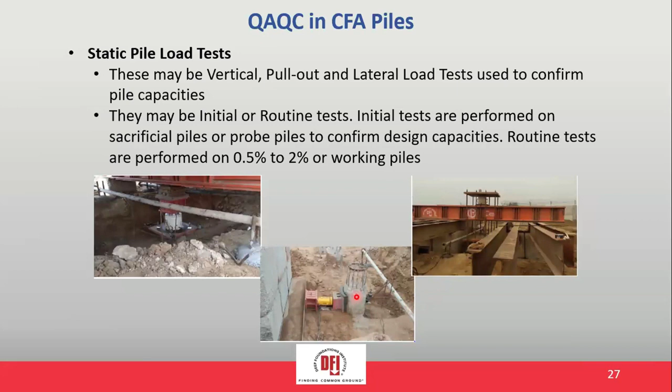Quality assurance tests that can be applied are typical tests likely used for any other piles. You can conduct the static load test for compression, tension, and lateral load. There can be a high strain dynamic test with a setup typical for any other piles. You need to have an integrity load test performed. You can also have a low strain dynamic test, or perform either the thermal integrity profiling test, which is a recent addition of technology in the Indian scenario, or even cross-hole sonic logging.

With thermal integrity profiling, you can get an idea of the pile integrity not only during the starting stage but throughout the life of the pile, as long as the sensors and data logger are active. This means the curing of the concrete, and how and at what rate the gain strength is attained, can also be recorded by the thermal integrity profiling test. So it has much advantage in terms of data compared to cross-hole sonic logging.

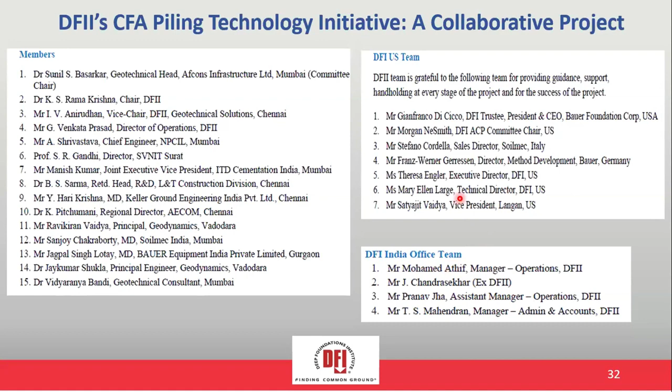Now, this is a very interesting technological trial we undertook at Hisar's location in Haryana state. This was an initiative of DFI of India, and an elaborate committee was formed to ensure this technology initiative was demonstrated in the presence of all stakeholders in India. We had an elaborate committee, and thanks to its members, to the DFI USA team, and to the DFI office team, we could handle this problem in a very coordinated manner.

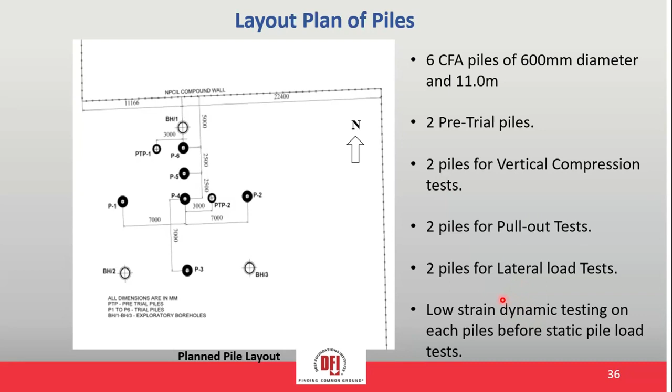So these were the 6 piles, the actual piles that were tested. In addition, we conducted 2 pre-trial piles just to get experience with the CFA tools, rigs, and flight. On these 6 CFA piles, we conducted 2 vertical tests, 2 pull-out tests, and 2 lateral tests. All piles were subjected to low strain dynamic testing to check integrity.

This was a typical reinforcement cage that was used. We used a 20mm bar as main steel and 10mm bar for the spirals, spaced at 150mm center to center. There were spacers in the form of flat MS flats, spaced at 1 meter center to center. Overall, it provided enough sturdiness to insert the cage into the wet concrete.

We had even installed 3 levels of instrumentation into this reinforced pile so that we could monitor the performance of the pile from top to bottom and understand the load transfer behavior.

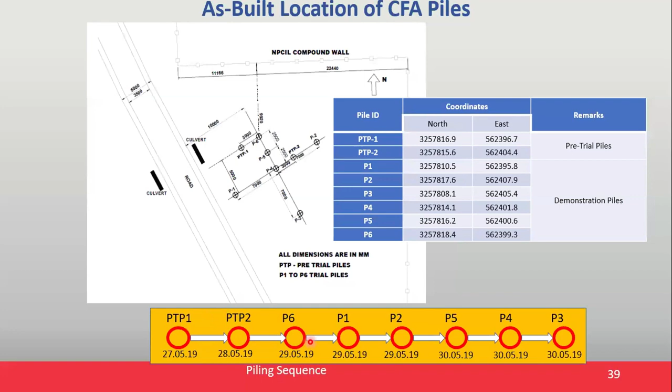So these were the locations, the coordinates of the pile, and the piling sequence. We had undertaken trial piles, which we call probe piles, and then P6, P1, P2, P5, P4, P3 were the sequence of piles undertaken. From 27th of May 2019 to 30th of May 2019, we were able to execute all 6+2, that is 8 piles together. It was a very encouraging result because the learning experience of PTP1 translated into successful execution of the 6 piles in this picture.

These are the piles executed, and the load test was performed during November 2019, about 5 months from the date of execution. There was a pull-out load test with 70 tons of load applied. For vertical compression, 170 tons of load was applied. And for lateral, it was subjected to 12 metric tons.

Some of the snapshots of the DFI trials. This is a panoramic view - you can see the rig fitted with the continuous flight. This is the concrete pump, pumping concrete to the top of the CFA auger through these tubes. There is a 55-ton hydraulic crane available, ready to lift up the cage and insert it into the wet concrete. This is the cage fabrication in progress.

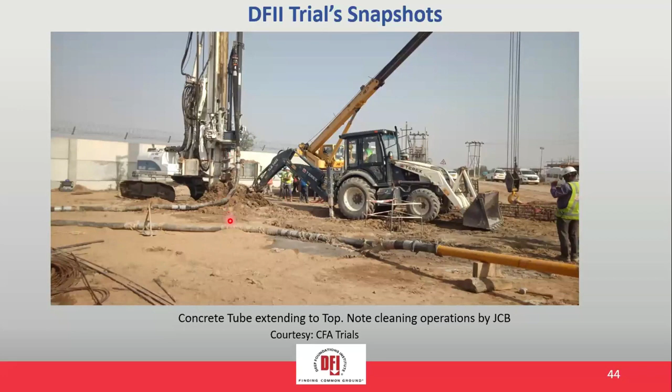You can see this concrete tube extending to the top of the flight, and inside the flight there's a particular hole that transfers the concrete to the bottom of the tube. This is the actual slump measurement in progress, and you can see we intentionally poured concrete on the surface to show the flowability of the concrete, which is an essential requirement.

As soon as the pile is concreted, the fact remains of inserting the cage into the wet concrete. The cage has to be inserted essentially by its own weight, and that requires a very essential element - the flowability of the concrete used for the piling. So this is what the concrete looks like, and after insertion of the full cage, this is what it looks like. You can see it is still in fluid condition, meaning after a couple of hours, the hardening of the concrete will take place.

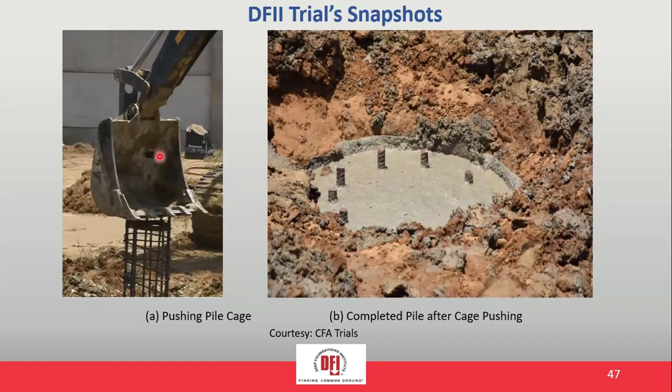A couple of cages required to be pushed by some manual means. We used this excavator bucket to push the cage into the wet concrete. We had performed the load test on the CFA piles - this is the vertical load test performed on P2 and P3.

170 was the test load, whereas we have applied 179.87 of the maximum ton.

Sorry to interrupt you, sir. Dr. Basarkar, sir, we have only 5 minutes. I'll wind up in 5 minutes. Thank you, please. Okay, thank you.

This indicates that the quality is identical for the two piles and the capacities obtained are identical for the two piles. Same thing goes for the lateral load test also. The two piles are replicating the capacities in exact terms, which indicates consistent quality. We had obtained close to 70 ton of capacity, and probably more of the uplift capacity for this pile. The advantage of the CFA pile is very, very apparent.

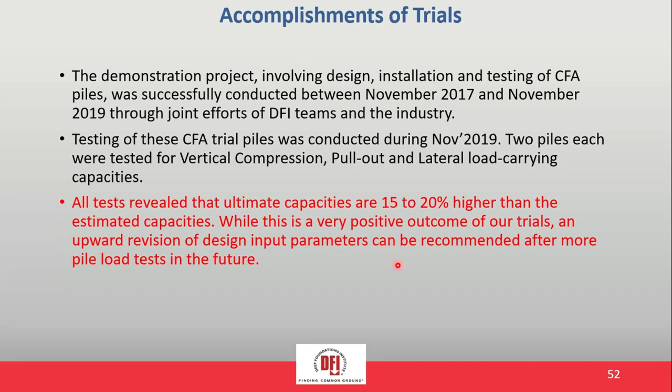The demonstration involving the designs had taken place. It was a very successful demonstration with all the stakeholders. Testing of the piles was conducted and we authenticated the design requirements. We found that the capacities can have an upward revision between 15 to 20% than what we get by conventional pile designs.

We have come up with a lot of documents based on our experiences of this technology initiative. We have a DFI document for design and construction of CFA piles. We have a CFA pile trial installation report covering our experiences of pile installation, the quality norms we had taken, and the tests of quality we performed. That is exactly brought out in this document.

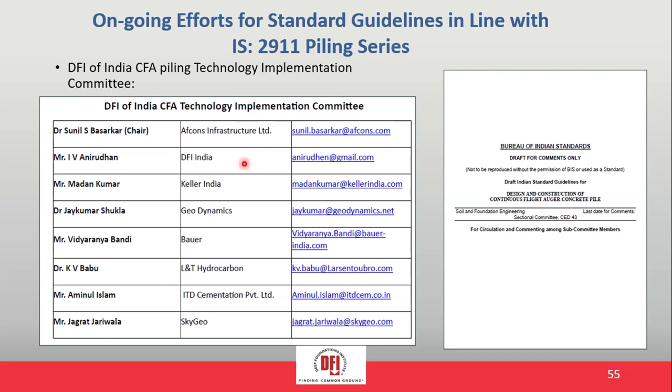So this is the CFA piling committee of DFI of India, and thanks to DFI for giving me an opportunity to chair this committee and perform a series of technology implementation trials and see that CFA piles can see the light of the day in India.

Now the efforts are nearing fruition, and CFA pile design and construction is going to see an IS code in line with the 2911 series. The committee will continue to put up efforts to facilitate implementation of this pile in future Indian projects. For your information, CFA piles have already been executed in the states of Assam and Gujarat, and we are going to see much more of this activity coming up in the near future.

Now, what can the stakeholders do? As a client, you can strive to include CFA piles in the tenders. You can prepare specifications for CFA piles and include them in the tender documents. You can encourage use of CFA piles for non-tendered locations where a tender does not exist.

As an engineering contractor, you can strive to execute CFA piles at sites where the contract conditions permit. You can use CFA piles for normal or minor civil structures. You can encourage use of the piles with the available equipment of CFA piling.

As an equipment manufacturer, you can facilitate availability of the equipment on an economical mode to start with. You can even have it on a rental basis, supplying it to contractors so that piles can be executed where the numbers required are less.

The CFA equipment under special conditions of low headroom or access issues can be supplied by the equipment manufacturers. As academicians, designers, and valuable stakeholders, you can facilitate use of CFA piles by your own means. You can promote and disseminate the merits of CFA piles, and carry out research for quality and capacity enhancement of the CFA pile.